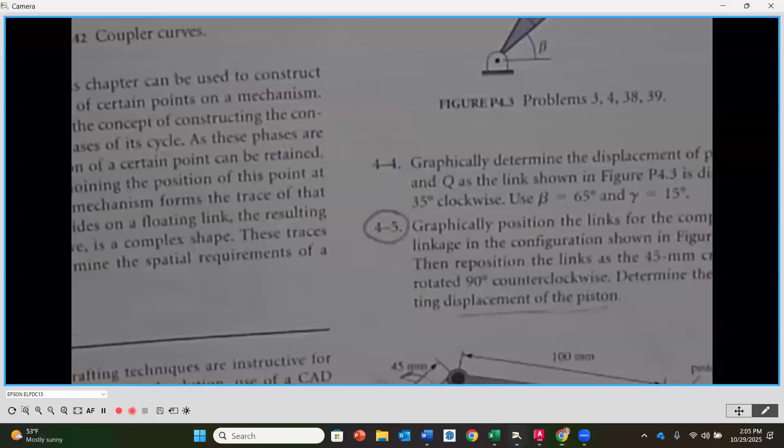So let's look first at the problems that we have, starting with 4.5 at the end of our chapter. Okay, so this is going to start on page 101. You'll notice that we have problem number 4.5 and 4.6. These are both going to utilize the same diagram that we see right here. The starting position is exactly what you see drawn. So you're going to draw this in its starting position, but it's the same diagram for both 4.5 and

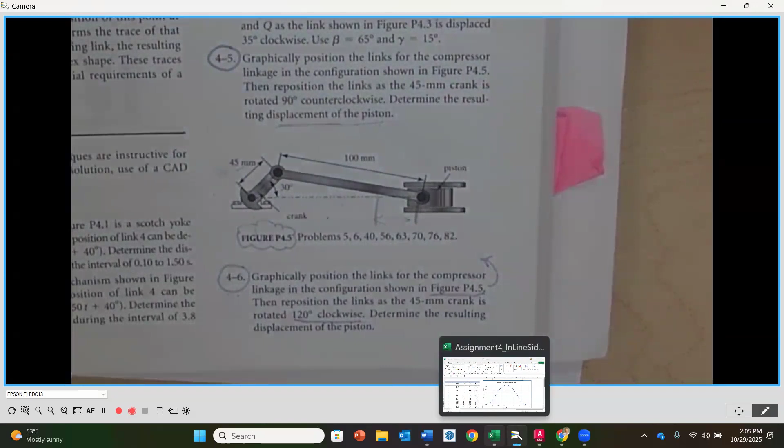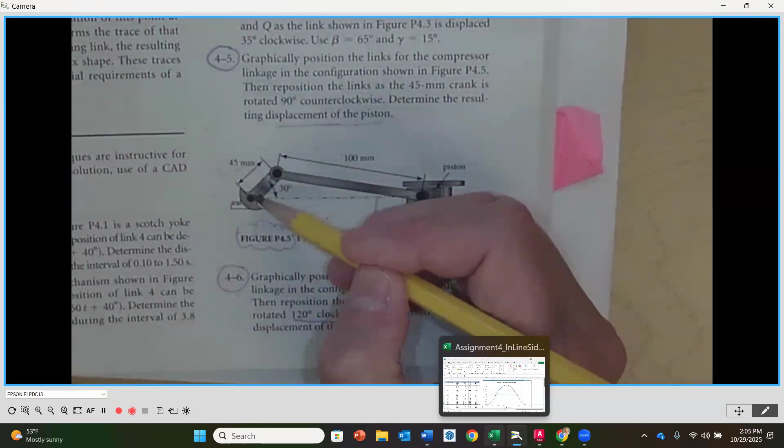4.6. For 4.5, you are going to move from the original position here at 30 degrees. You're going to move the crank 90 degrees counterclockwise. You are not going to show it going straight up and down. Don't show it going to 90 degrees. You're going to go 90 degrees from where it's at. So that crank is going to be over here, making a 90-degree angle to what is 30 right now. Does that make sense? Okay. So you're going in that direction. Then you're going to dimension what the displacement is of the piston to its new position.

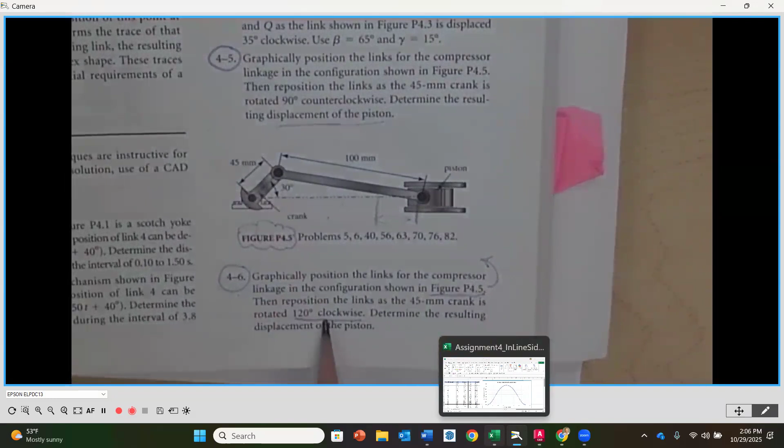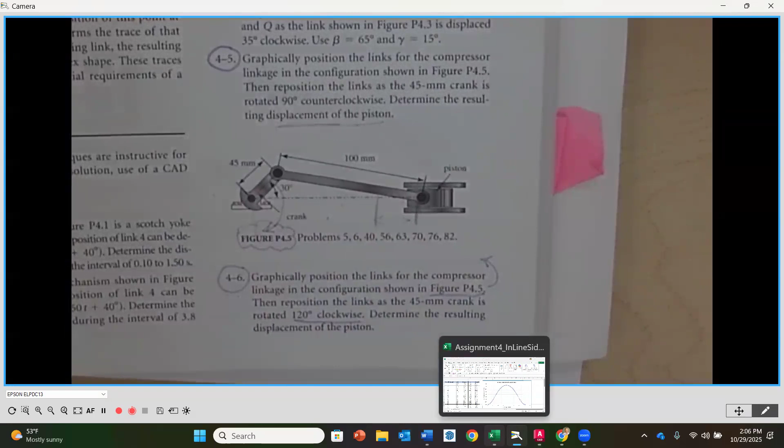Okay. Then starting back at the original diagram for 4.6, you're now going to move 120 degrees clockwise. So you're going to go 120 in this direction, and then you're going to, again, measure what the displacement was from the original position that we started at here. Okay. That's the first 2 problems. And again, for both of these, you're not only doing the diagrams, but you're also doing the mobility equations for each. You should get 1 for all of these, but it's a good verification that you have the correct number of links identified as well as the number of joints. Okay.

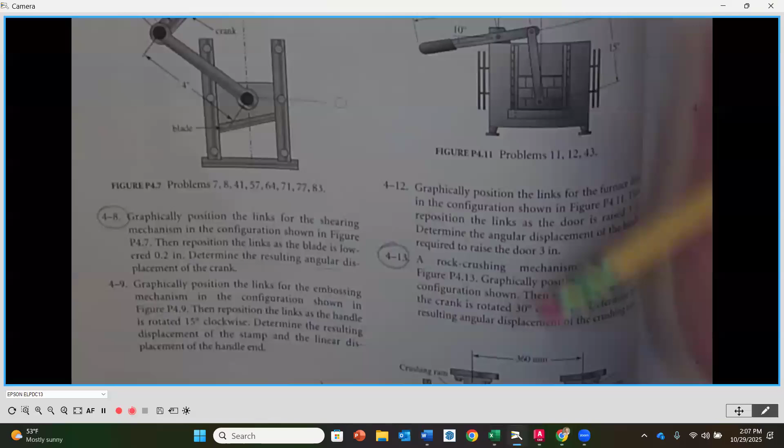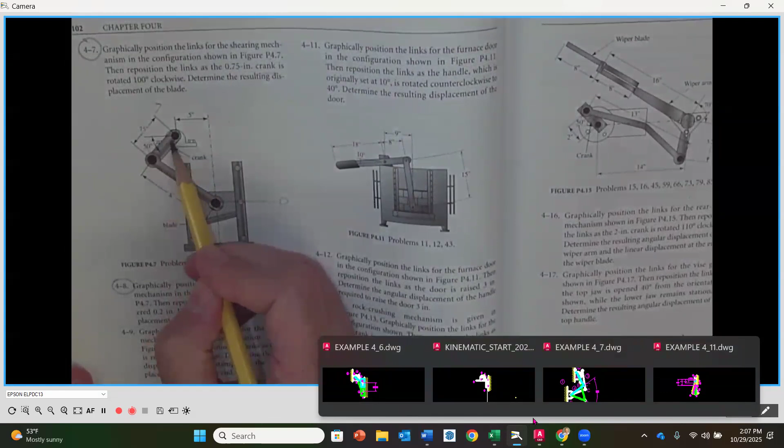All right. Turning the page. The next 2 problems you're going to be doing are going to be number 4.7 and 4.8. They, again, are going to utilize the same diagram in the middle. So this is your start position, and then you're going to move the crank 100 degrees clockwise. The crank right now is at a 50-degree angle. As we can see here, here's the crank, okay? You're going to move this clockwise 100 degrees from that position, okay? And then you're going to measure from where this is at here, how far did that blade go up, okay?

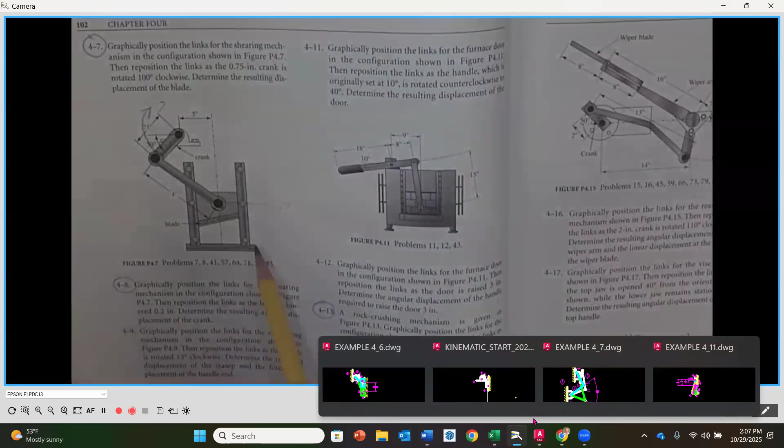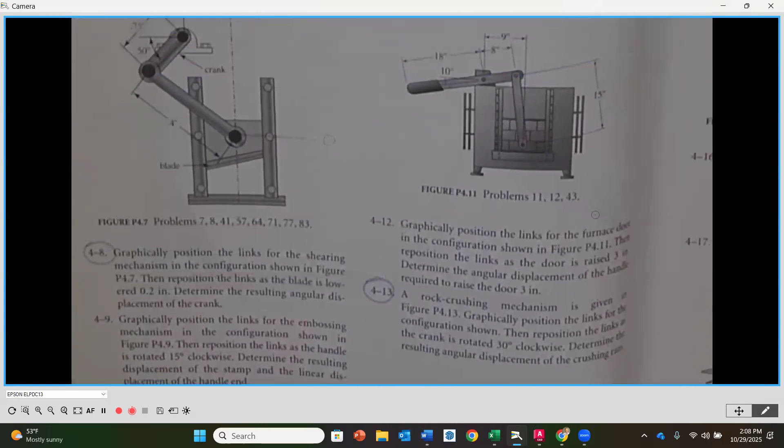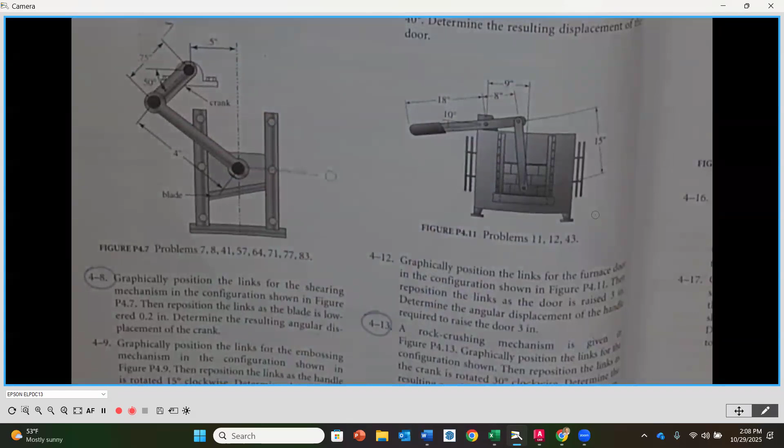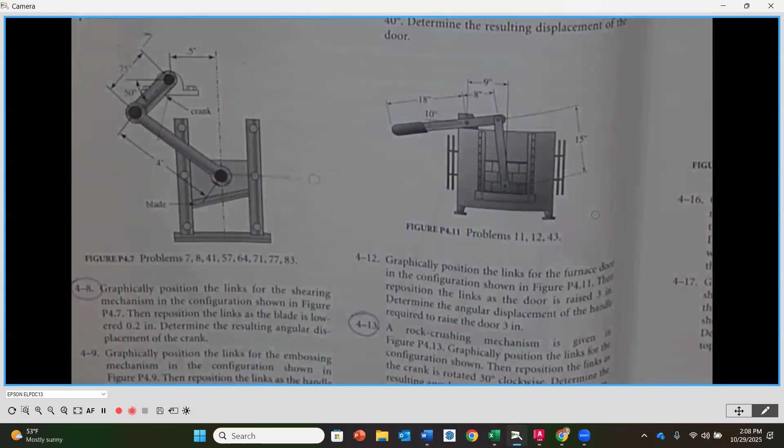Utilizing the same start diagram, you're now going to do 4.8. Now, 4.8 is a little different. It wants you to reposition the blade to be lowered 0.2 from where it's at. So you're going to start with this as your home, and you're going to move the blade down 0.2 inches. When you do that, you're going to reposition the links, if you would, backwards, and you're going to find out how far did that crank move angularly. This is an angular displacement because, remember, it's fixed around that center and it's going to be an angle that you measure, not a distance. Okay. So that's 4.7 and 4.8.

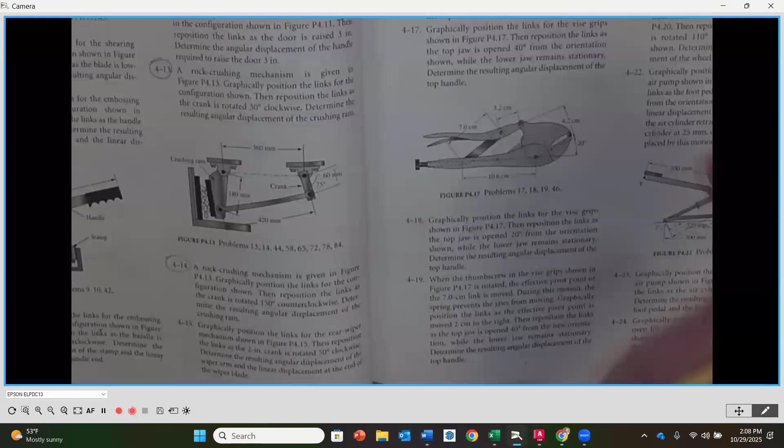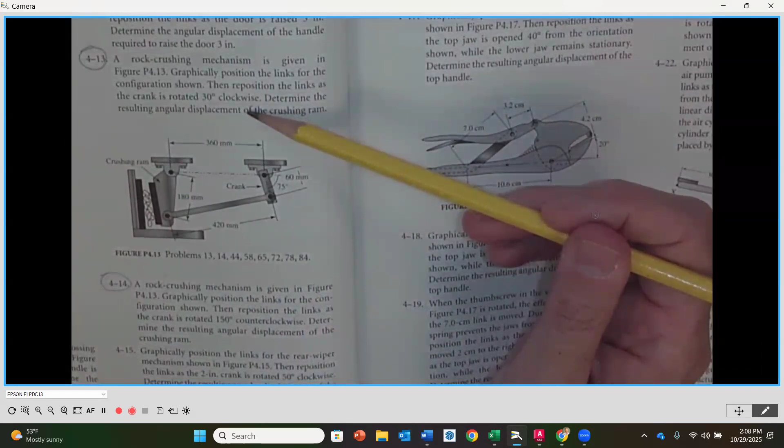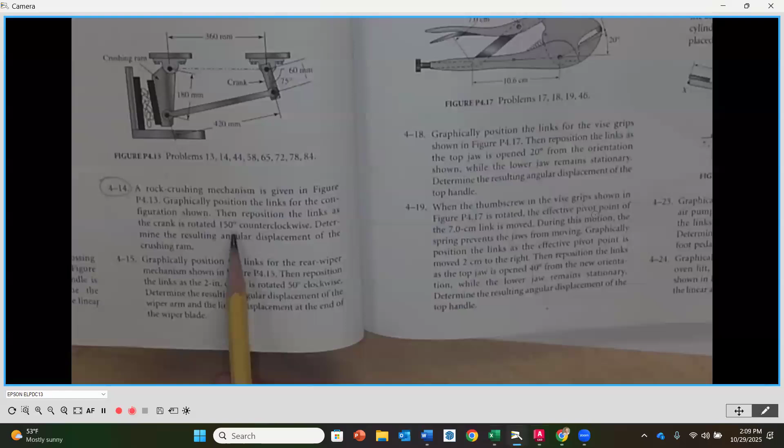And then 4.13 and 4.14, you're going to be using this diagram that you see here, okay? The rock crushing diagram, and you're going to reposition from this, if you would, home position. The first one, you're going to rotate the crank 30 degrees clockwise. Here's your crank over here. It's identifying it for you. And then in the second one, you're going to reposition the link so that the crank rotates 150 degrees counterclockwise, right? And then you're going to measure the angular displacement that your crushing ram makes in each case. So again, angular displacement is going to be degrees, not linear displacement. So those are the first 6 problems with mobility calculations for each.

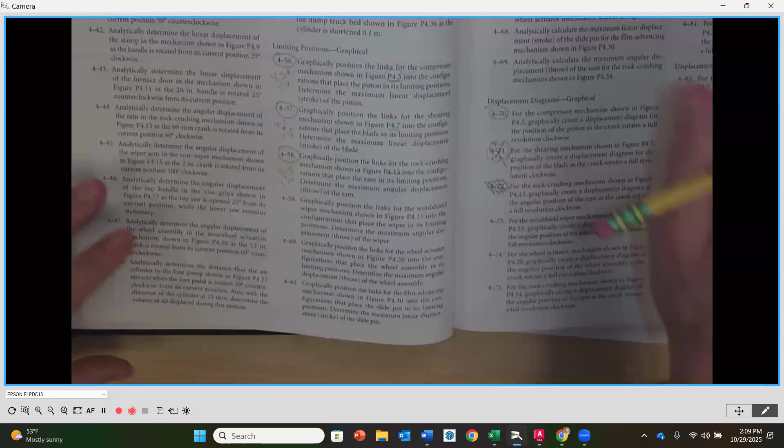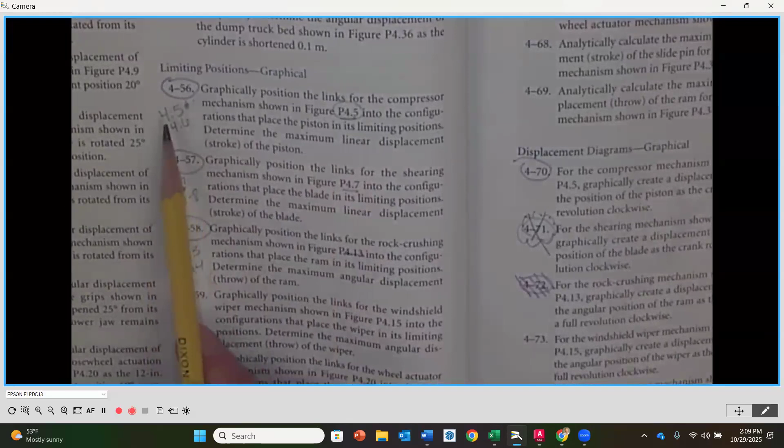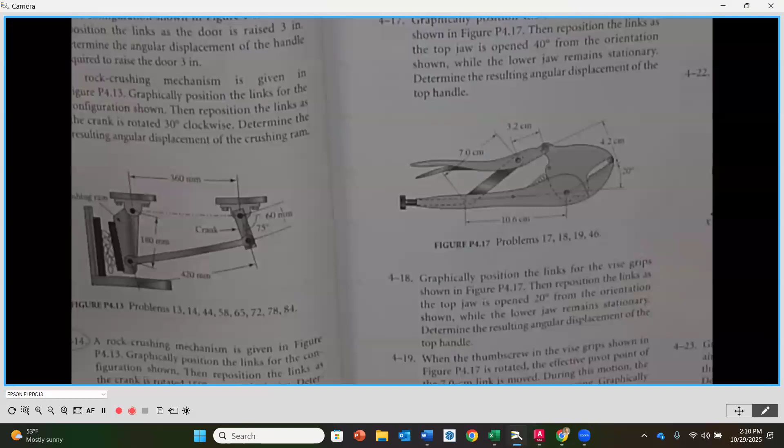Then the next problems that you have are going to be 56, 57, and 58. We turn the page a couple times, okay? We're going to go to page 106. And in this section right here, it's called limiting positions graphical. For 56, you're going to graphically position the links of the compressor mechanism. You did that compressor mechanism in 4.5 and 4.6. Okay, it's the first two that you did. So you're going to take that and you're going to find what is the furthest out point and what is the closest point. Okay, so if we look back over here to page 101, you're going to lay this down so that this is all in line. What's the furthest point out here?

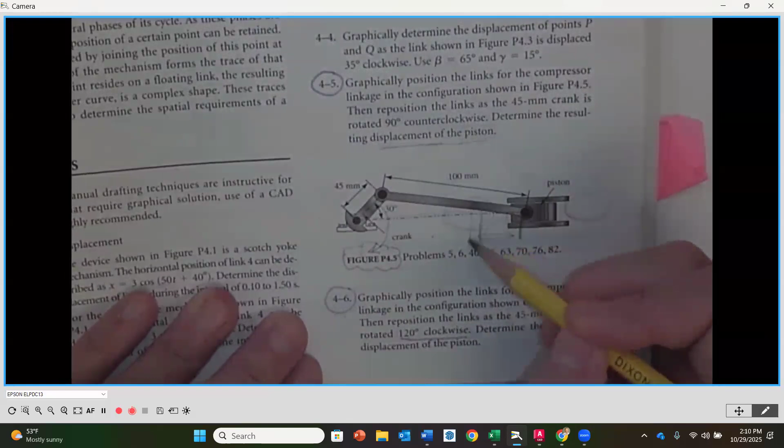And then you're going to find out what's the furthest point here, and then really what the resulting stroke is. What is the difference between this and this? Make sense? Okay, so that's 56. You already drew that diagram, so you can start from there. You don't have to start over.

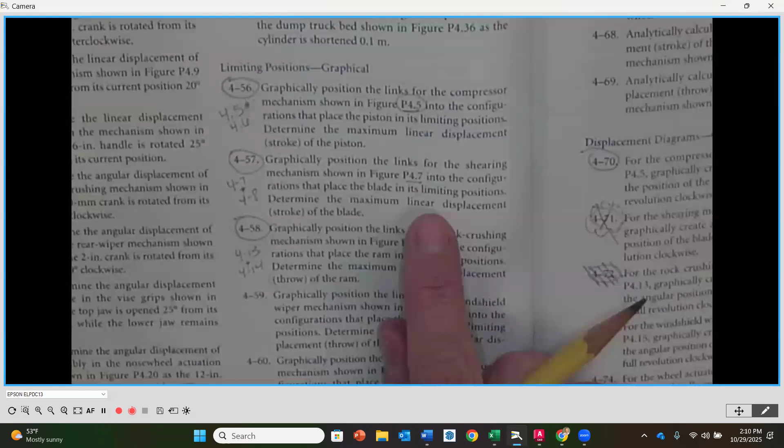Then for 57, this is going to be graphically position the links of the shearing mechanism. Oh, that sounds familiar. That's 4.7 and 4.8. And you want to find the highest point of the blade, how high it's going to go, and how low it's going to go. So that's going to be this one.

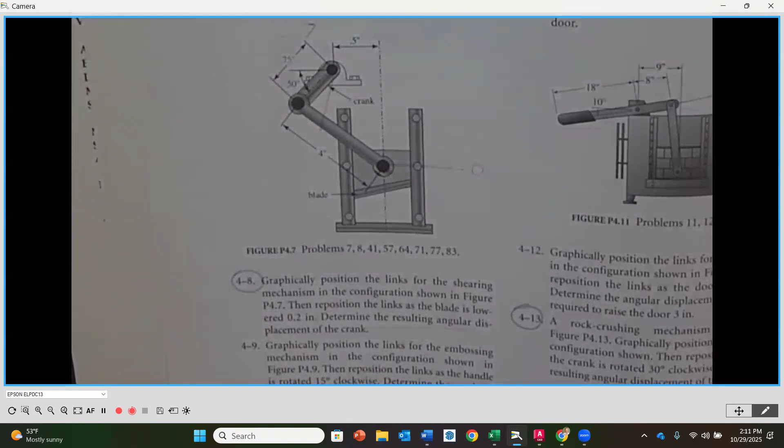Okay. Oh, hi, Mike. Sorry, I am. Oh, okay. All right. I'll come out in a couple minutes. I'm not here tomorrow. I'm only here today. So next week. Oh, no problem, Mike. Thank you. Thank you. You too.

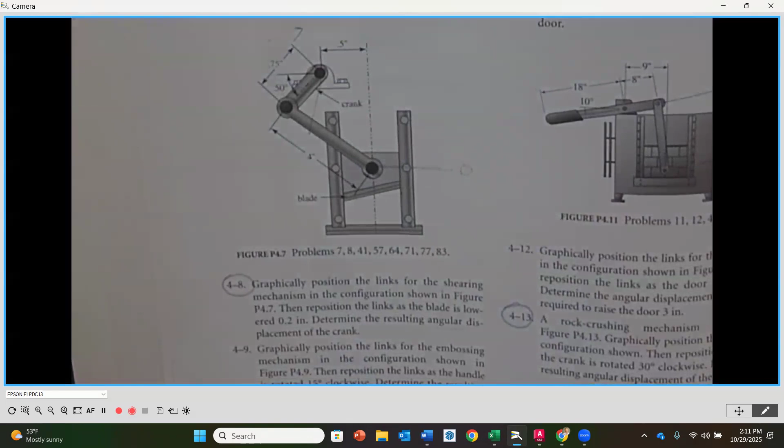Okay. So then here, you're going to find out how high this is going to go and how low that's going to go and what the stroke would be of those two. These first two problems are going to be like example 4.5. Wait. No, I'm mad at myself. Oh, no, 4.6. These two are going to be like 4.6, where we found the highest and the lowest positions. These are slider-crank mechanisms. So those are going to be like that first example.

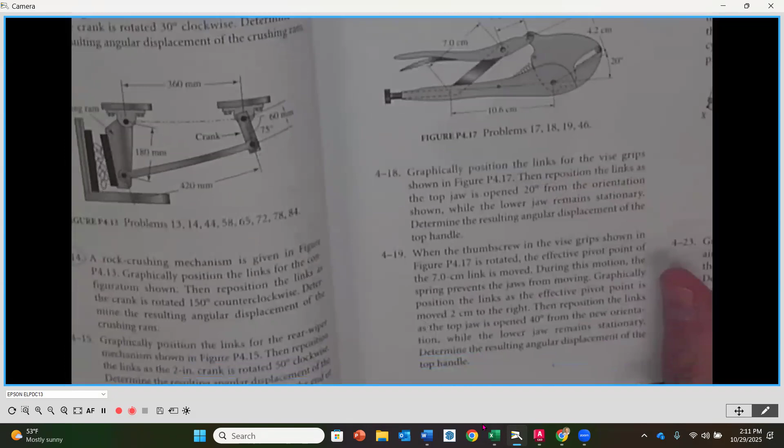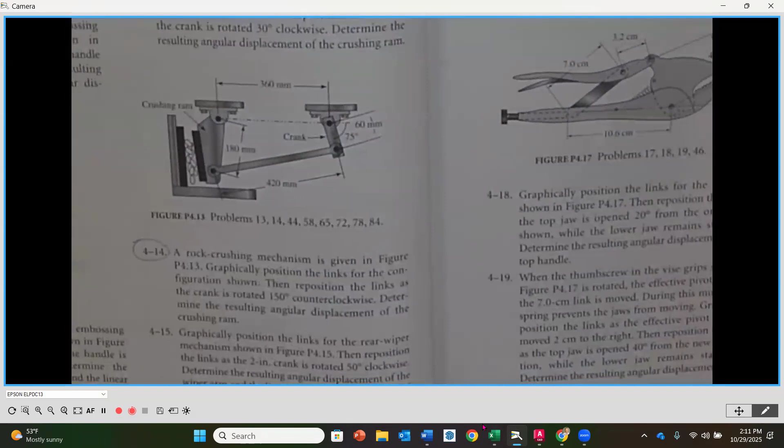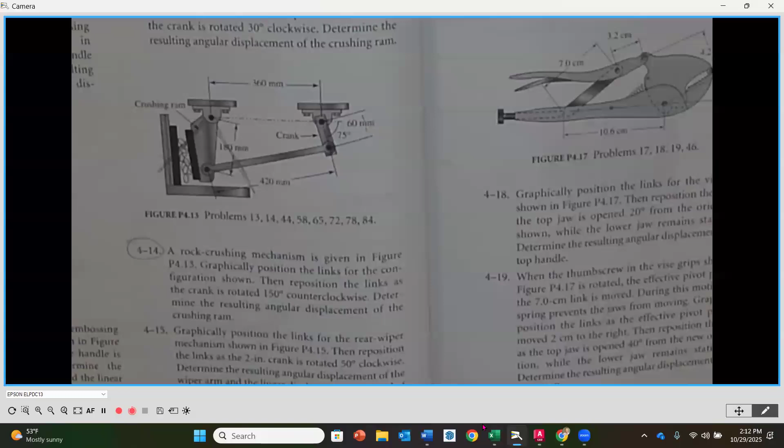Then for problem number 58, we are going to be finding the limiting positions for the crushing ram. So in this case, how far out that crushing ram is going to go and how close it's going to go. Now, since this has a fixed center, this is going to be an angular displacement from the furthest to the closest. This is going to be like that car wash nozzle that we did, which was 4.7.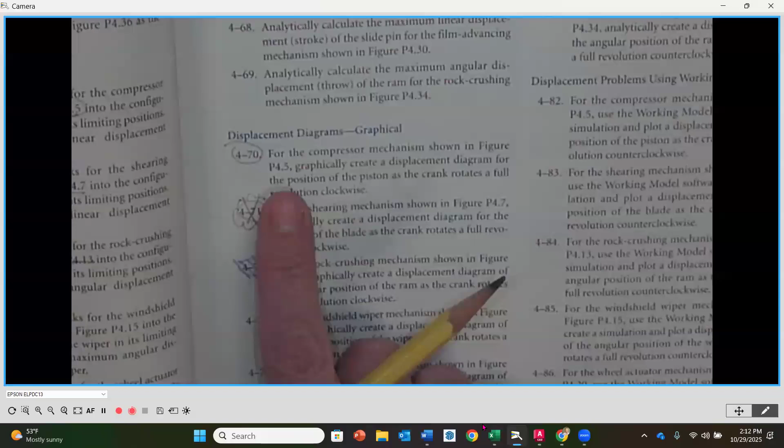And then the last problem that you have is going to be 4.70. 4.70 is on page 107, and it is a displacement diagram for the compressor mechanism shown in figure 4.5. That's the first problem that you do in this section. And you want to graphically do the displacement diagram. Now, you're going to use the Excel spreadsheet to assist you.

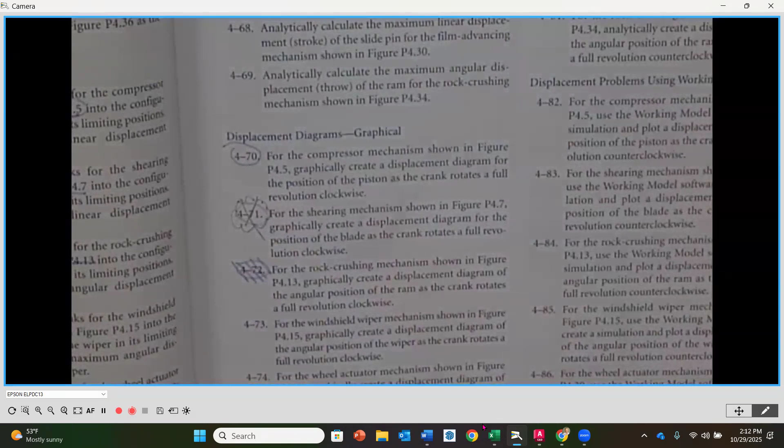So if I go back to my Excel spreadsheet, I'm going to put in the length of link number 2 from that mechanism for problem 4.5, and then the length of link number 3. And it's going to create everything here for you. It's going to fill in the numbers, create the displacement diagram, and calculate your stroke. So that's the numbers, right? That's going to do it for you.

But then you're going to do what we did in our example 4.11, and you're going to draw the positions. So in this assignment, you're going to use the spreadsheet, but then you're going to do the positions of 30, 60, 90, 120, 150, and 180. So every 30 degrees instead of 45. And then you are going to be attaching the Excel spreadsheet with the numbers.

Does that make sense? Okay, so you're going to go back to Excel here and change these. You're going to save this as whatever you want, example 4.70, but make sure you put your name on it, because I have to download the files themselves to check them, so it has to be different than what the previous person did. So for instance, Steve, you can put example 4.70 SS or something like that. Just something that makes it yours, so when I download it, it's not going over the previous students' files. Is that helpful?

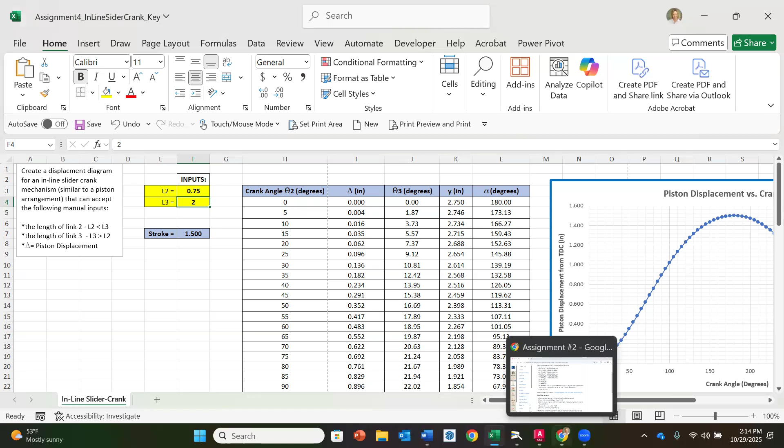Okay. So for that last one, make sure that you add the actual Excel spreadsheet so I can check the numbers, not just a screenshot. Otherwise, it would be like 3 screenshots because it's kind of a lot. I figured just do the file, then I can be sure that everything is good. Now, that is the assignment. Are there any questions at the moment?

You're going to notice here that I do have final answers for pretty much all of the values. If you don't get the final answers, then something in the setup wasn't quite right, so at least you'll know. Once you get things to match up, then you can move on and you know it's okay. Or ask questions. Let me know if you weren't able to get something going, and ask for some assistance if you need it. So those are there.